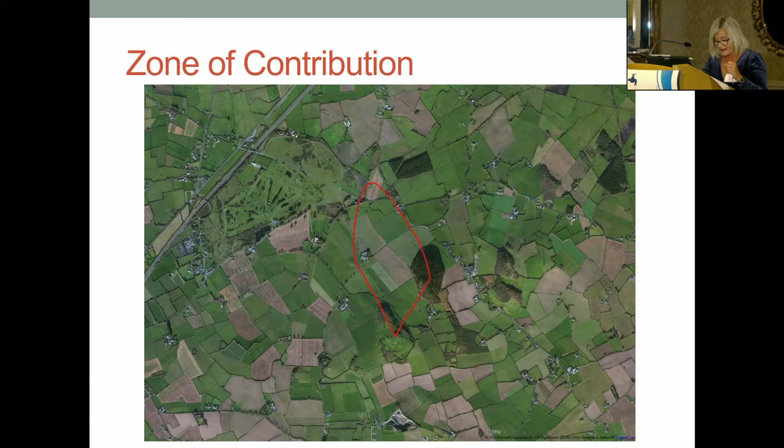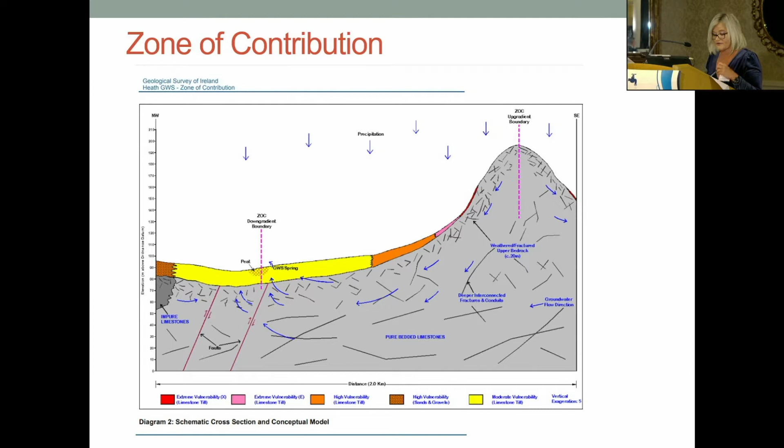We had a comprehensive zone of contribution study carried out in 2015. This study gave the scheme invaluable information about the terrain surrounding the spring and about our water source, and identified any areas of concern in the contribution area. The scheme continues to identify and map the potential contaminant hazards and activities within the zone of contribution, ever fearful of a negative impact on its water supply, its water quality.

Extraction point and pump house. The second critical control point is the abstraction and treatment plant. I'm going to take these 2 points in tandem as they work together. The spring and purpose-built chamber pump house are located within a fenced site and the spring source is located next to the pump house in a purpose-built spring chamber. The chamber is fitted with a lockable steel covering.

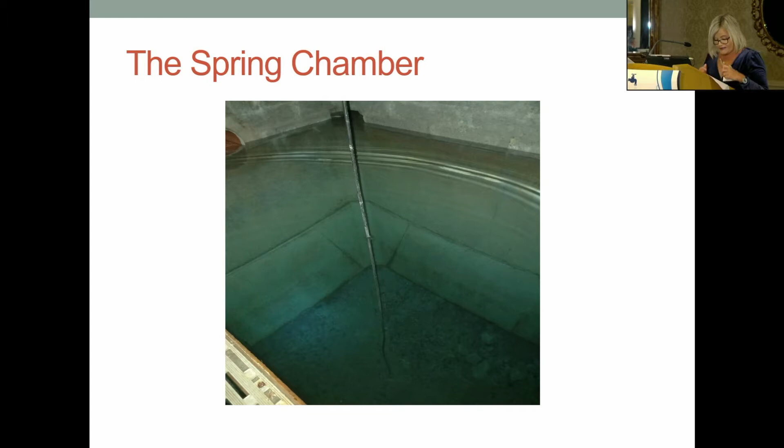There is also an overflow chamber located about half a metre below ground level. This is a V-notch chamber and the excess water which overflows from the well flows out and away into a nearby river. The volume is monitored by a flow valve system and this data is stored on a hosted cloud. Sorry, I'm gone a bit behind on my slides. There are 2 water pumps installed in the spring chamber and they pump the water to the reservoirs alternately.

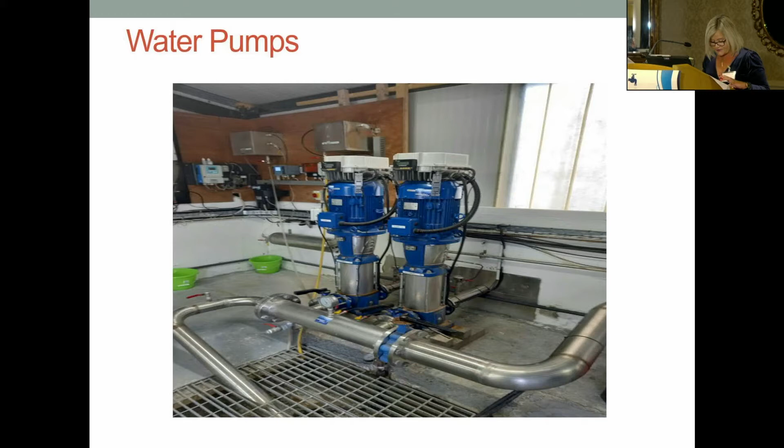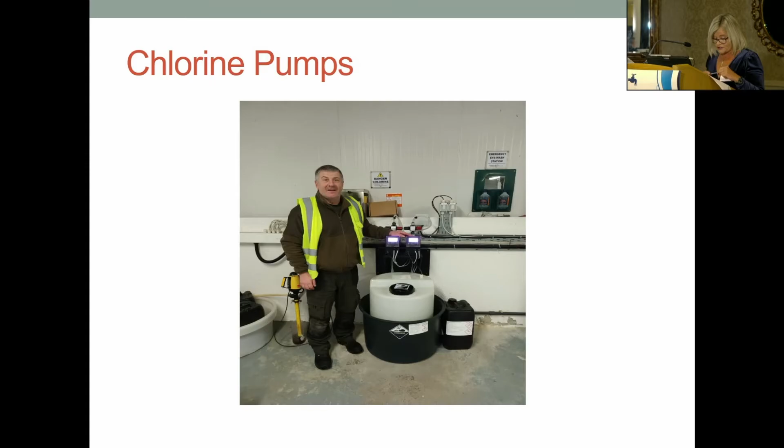The water pumps and chlorine pumps are fully automated and can be monitored remotely using water monitoring software. If the duty water or chlorine pump fails to kick in, their standby counterpart will start up. The chlorine dosing pumps in the system are flow proportionate. The dose rate for the system is based on a predetermined pattern, and manual adjustment of dosing can also be carried out if necessary. As I mentioned earlier, the water and chlorine pumps can be monitored remotely using cloud technology.

Those with login permission can view which pumps are running, the capacity in the reservoir, the chlorine pH level, turbidity, to mention but a few. This website is updated on an hourly basis. Slide 9 depicts that at the particular time the photograph was taken, water pump 1 was the duty pump and pump 2 was on standby. We can also see the pressure and reservoir levels.

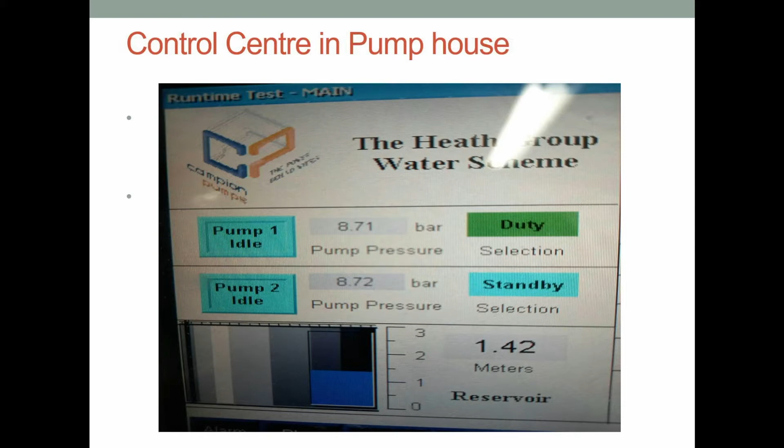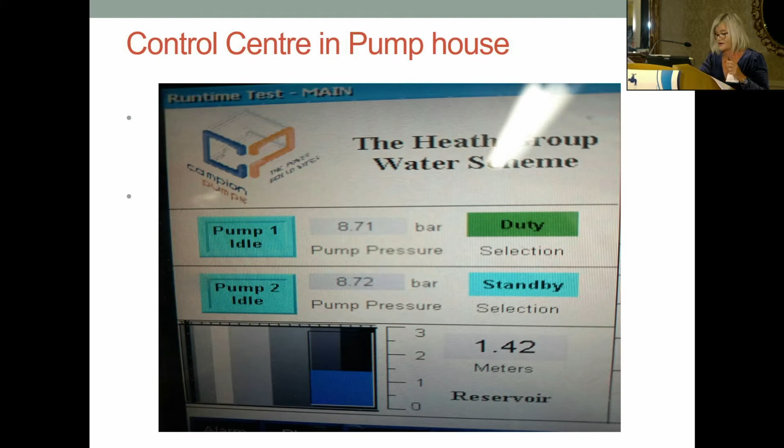Acceptable levels for each control were set following discussions with our engineers and service providers. If any of the set levels are exceeded or not reached, the relevant personnel receive either a text alert or an email from our service provider to advise that there is an issue.

All equipment in the plant is serviced twice per year by appropriately qualified contractors, and all chlorine monitors are recalibrated about once per month and again after a power outage by our caretaker. Our caretaker has a QQI qualification in water treatment plant operations to enable him to carry out these calibrations. Full PPE gear is supplied in the pump house, and a safety statement and accident report register are also maintained in our pump house.

We then move on to critical control point number 3, which is our reservoirs. Once the water is treated in the pump house, it is pumped to 2 reservoirs which are located atop a hill about 1.5 kilometres away from the pump house. The reservoirs have a capacity of 95 and 190 metres cubed respectively, and they are located on a fenced, locked site. Each reservoir has a max depth capacity of 3 metres, and when the reservoirs reach a capacity of 2.6 metres, the water pumps cut out.

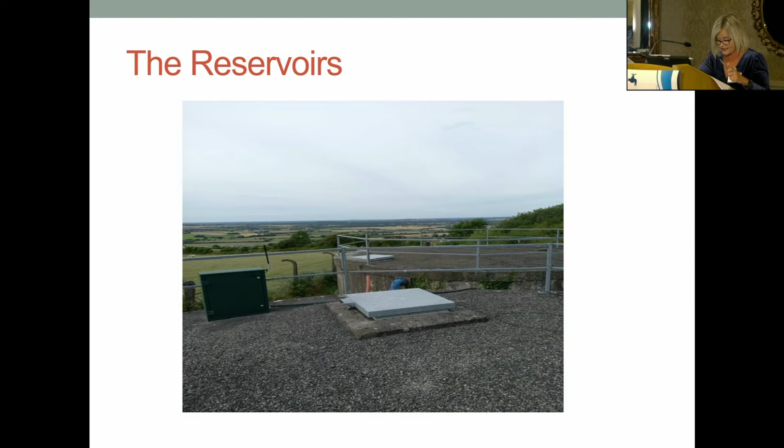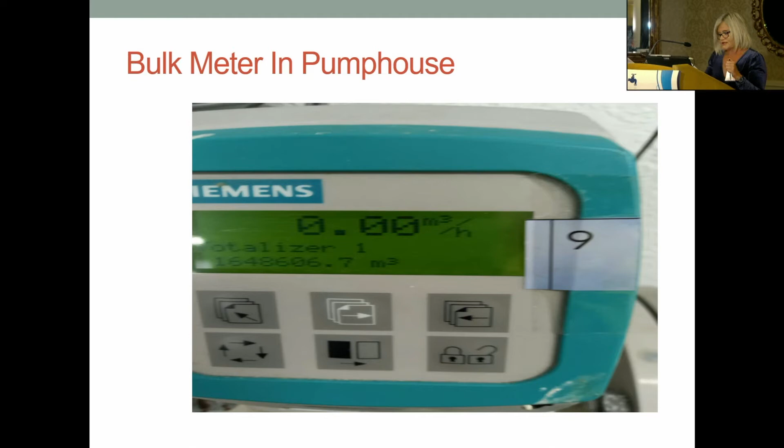Slide 12 is an example of the bulk meter in our pump house. This bulk meter measures the volume of water which is pumped to the reservoir every night or day. The reservoirs are checked both internally and externally on a regular basis for cracks, seepage, etc. In 2018, the scheme received capital grant funding to install a new chlorine monitor which tests the water as it leaves the reservoir before it reaches any consumer.

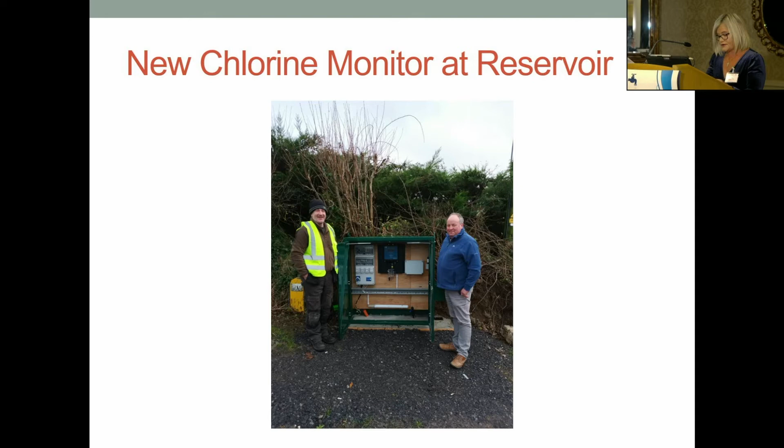The data from this monitor is fed back to the pump house and also available to view on My SCADA Cloud. Our caretaker also manually checks the chlorine levels in the treated water on a daily basis with a handheld HACH colorimeter. Again, he also calibrates the chlorine monitor at the reservoir at least once a month.

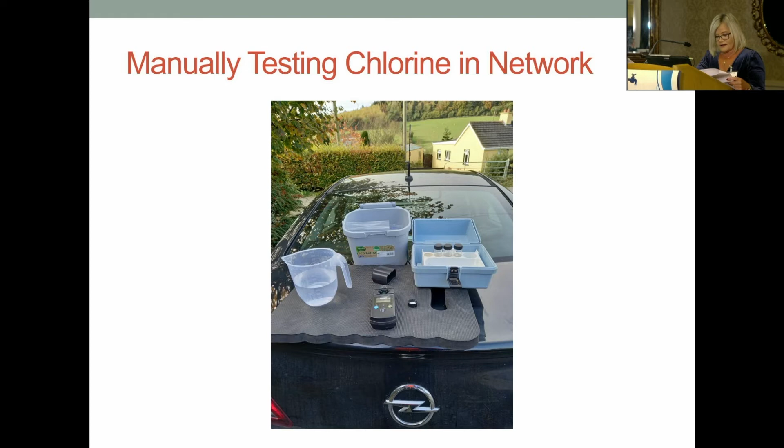The scheme has identified the distribution and pipe network as critical control point number 4. We currently have over 40 kilometres of pipe network, about 80% of which has been replaced in the last 10 years, and we are hopeful that we will receive further funding in the next programme to replace the remainder. The scheme network is divided into 8 districts, and each of these is allocated its own bulk meter. Bulk meter 1 is the main bulk meter which measures the total volume of water going out into the network.

Some of the 8 districts are further subdivided into smaller areas, and each of these has a mini bulk meter assigned. There is a further chlorine analyzer located in the middle of the network, and again the data from this monitor is fed back to our pump house. The scheme has several sluice valves installed across its network. These are used to control the flow of water through the pipe network, and they can also act as a shut-off to isolate the supply.

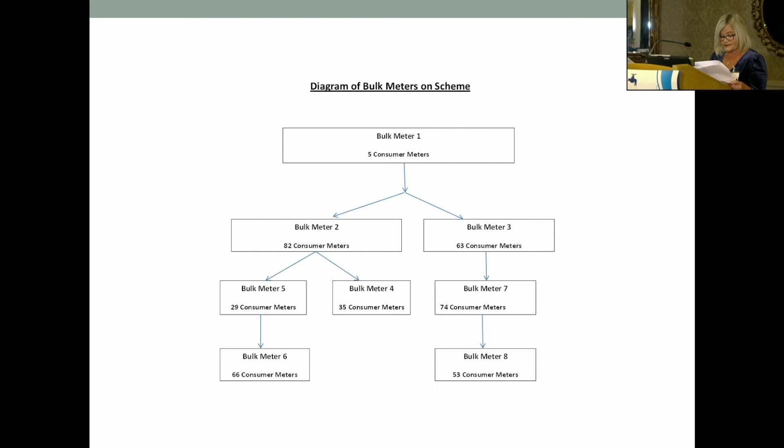Our scheme always uses the same contractor to carry out our connections and repairs. All works carried out on the road are covered by the appropriate road opening licence. A map of the complete network and all the connections is available for reference in our pump house.

The fifth critical control point is the automatic shutdown of the plant. The auto shutdown of the plant and the upgrade of the monitoring system means that the plant will shut down if any of the set control points are not reached or exceeded. This auto shutdown system gives great peace of mind to the scheme, whereby if an issue occurs, the plant will shut down and avoid any contaminated water reaching the reservoir and thus the membership. Again, the auto shutdown will automatically trigger a notification to alert relevant personnel that there is an issue.

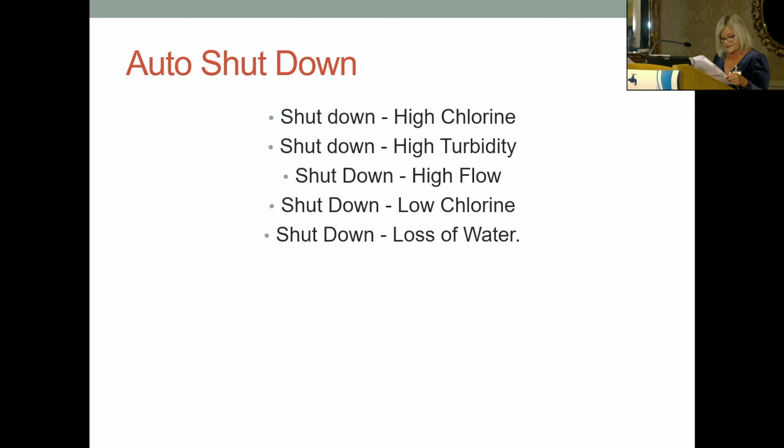In addition to the 5 critical control points above, the scheme also places great emphasis on a few other important factors, one of which is technology. All the systems in the pump house are automated and can be monitored remotely on host sites. The scheme has 2 systems in place to monitor the consumption on its bulk meters. The first system which the scheme has installed is a web-based data collection and management system which provides live access to all the bulk meter readings.

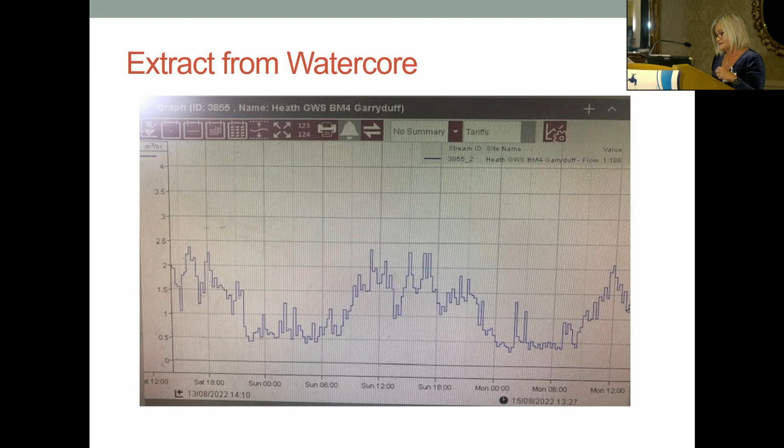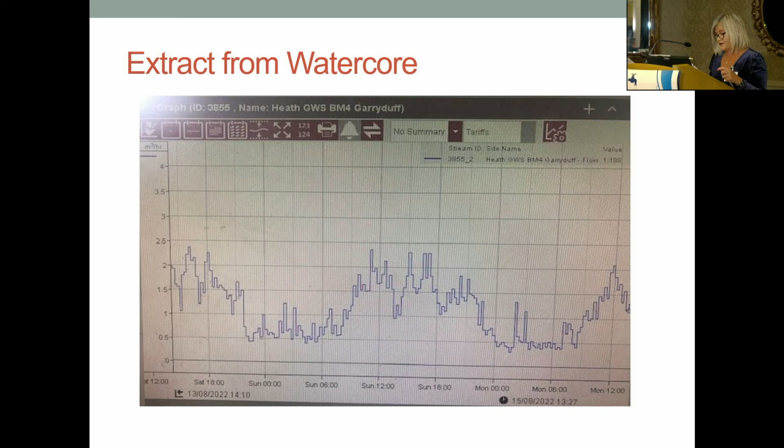In 2018, the scheme received capital grant aid to install another web-based data collection system for reading the bulk and the consumer meters. Every bulk and consumer meter on the scheme is now fitted with a transponder, and the scheme has a handheld reader, which means the caretaker can drive around all our connections and pick up the latest meter readings telemetrically. These readings are then uploaded to a cloud-based system and we can extract data from same.

Now, this is a little bit blurry. This is a slide of one of our bulk meters, and you can see the little bars on the graph indicate the levels of consumption, and it tells us when it was read and the average consumption which goes through the meter every day.

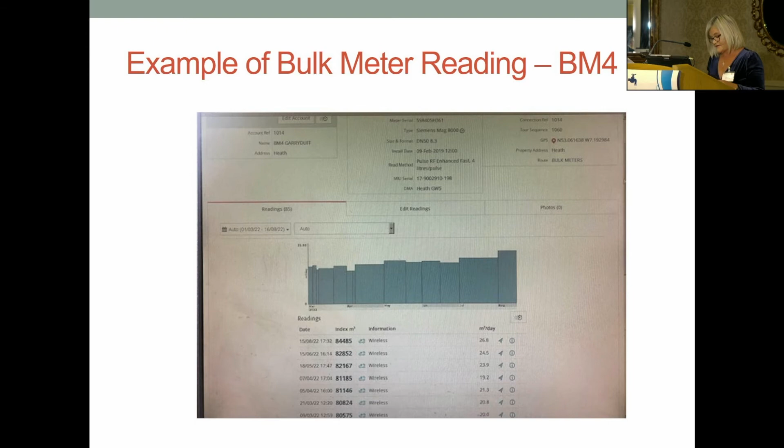Once the readings have been uploaded to the cloud, they can then be downloaded in the form of a data spreadsheet and used for billing purposes. As already mentioned, the scheme also subscribes to SCADA Cloud, which is an internet-based control and monitoring system which enables the scheme to fully monitor and control our water treatment and water pumping system. In addition to the online monitoring, our caretaker visits the pump house on a daily basis to record readings manually and to visually check our pump house.

The scheme engages the services of Fingleton White Engineers Portlaoise, who keep us abreast of advancements in technology in the water services industry. The scheme has also set up a free text alert system whereby we can update our membership instantaneously of water outages, meetings, etc.

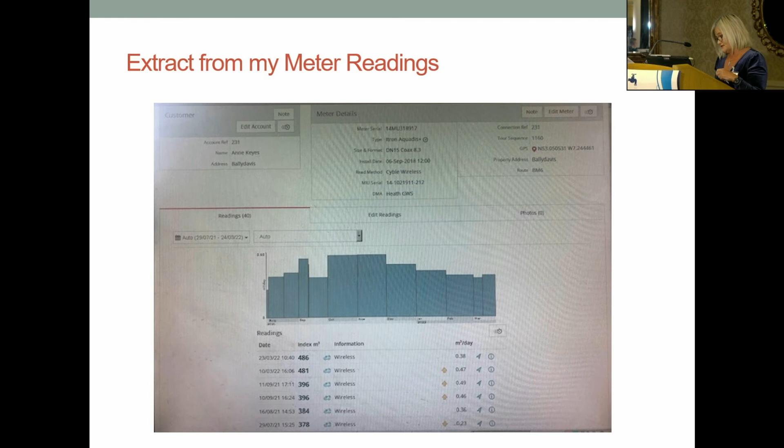Ongoing monitoring is another important factor. As part of its water safety plan, the scheme engages the laboratory in Laois County Council to carry out extensive tests on our raw and treated water about 4 times each per year. The raw water quality indicator parameters include total coliforms, E. coli, pH, alkalinity, nitrates, to mention but a few. We also have a full water audit carried out by Dublin City Council laboratory at least once per year.

And I'd like to give a shout out there to Mark Chalk. I saw him somewhere earlier on. Mark is the head of our laboratory in Laois County Council, and the service they give to our scheme is second to none. So thanks for that, Mark.

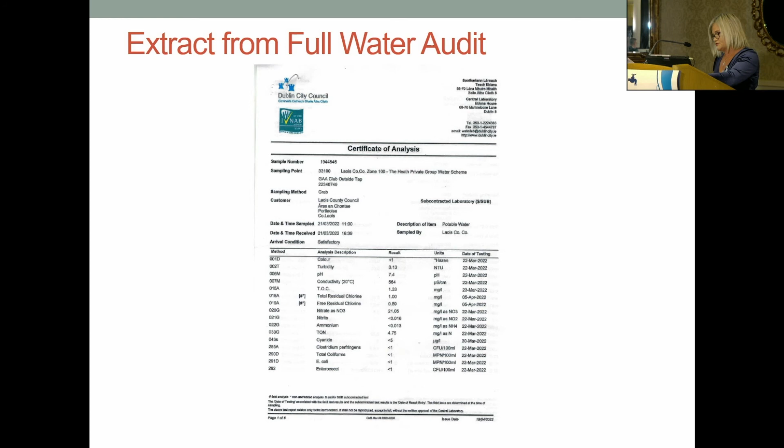We have also installed 2 water testing kiosks on the network and hope to roll out several more in the future. The caretaker and myself also always keep up to date with quality assurance training and other courses as recommended by the Federation.

Standard operating procedures for dealing with a water quality issue. The Heath Group Water Scheme has prepared a response procedure for a quality issue which will enable it to effectively manage the incident, limit the consequences and provide a framework for implementing procedures which will ultimately return the system to normal operations. It is of vital importance to keep the membership of the scheme advised of the situation and to provide important information to protect public health.

Several template documents have been set up and ready to issue to all members in the event of a water quality issue. Our text alert system would be activated to give immediate notification to our membership. This text alert, while immediate in effect, would be followed up by a more comprehensive notification in the form of a formal letter of advice from the scheme to all its membership.

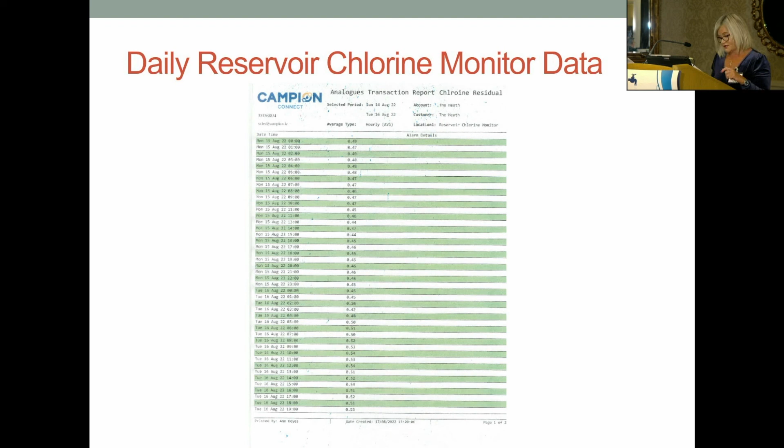Conclusion, you'll all be delighted to hear. Water is an invaluable life-sustaining force. Our scheme will continue to maintain, develop and improve its infrastructure and systems in the operation of its plant and network. We look forward to new developments and improvements in the water industry in the future and relish the opportunity to move forward with our suppliers and advisors.

I would finally like to end by thanking several persons who help us on a daily basis to maintain our water quality. The Federation in particular, Barry, Roisin, Adrian, Paul and Julie, who were always available for advice, support and training. I would like to thank Laois County Council, Water Services and laboratory staff, our engineers, our suppliers and of course our board, in particular our hands-on chairman, Mr Noel Boyle. And I would finally like to thank our fantastic caretaker. I cannot emphasise how important it is to have a good caretaker. That's John Delaney, and I kid you not when I say the man has water in his veins.